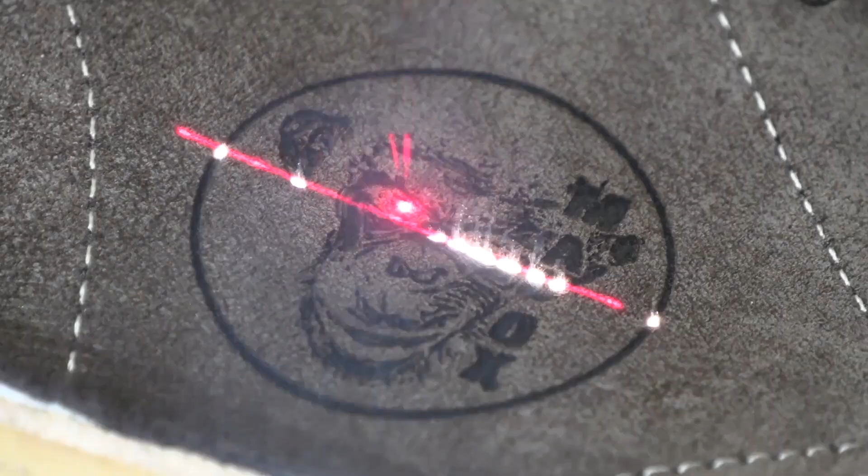In today's video, we're going to be doing something a customer requested: a 2-color 3D printed keyring or tag that's going to be attached to keys, with some words and a logo. Unfortunately, I cannot show that to you, so we're going to do an example instead using the AM logo, just to show you how it works. We'll show you from start to finish, design to print, with our K8 printer. So let's get started.

Okay, so we're here at our computer and we're going to start off with our 3D design. If you do not have a 3D drawing program already, I suggest using TinkerCAD. It is absolutely free, you can find it on the internet. Once you've downloaded what you need onto it, it's as simple as going import, then choose a file, making sure it's either an STL, an OBJ, or an SVG.

That is a pre-required thing you need in order to start with a logo or any text. But if you do not have a logo from a customer and cannot convert one, there is also a text tool built into this program so you can type the word out. Once you've typed it out, or got it as it is, the first thing we need to do is talk about size.

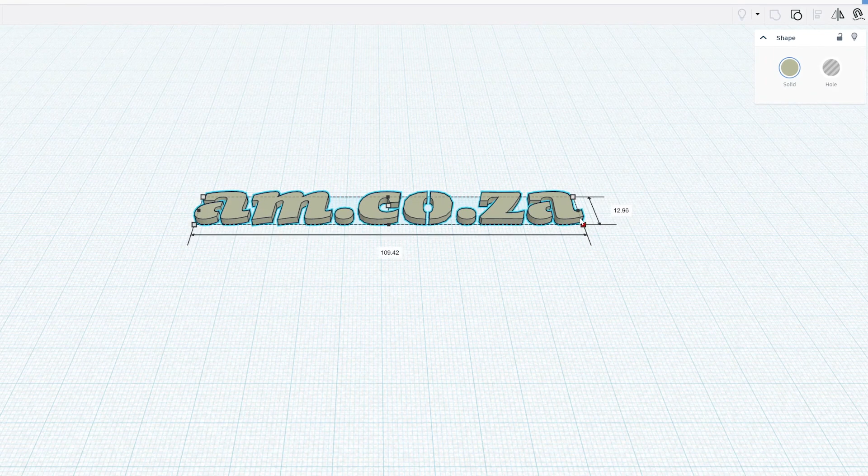We already have a size here, but I wanted to change it so it's a bit more accommodating to what we are wanting to do. We also don't want it to be too large, since it's attaching to a set of keys. So I'm going to hold down Shift on my keyboard and drag this in so we can get to an even proportional size. If you let go without holding Shift, it will just make it to whatever proportion. So we must hold Shift in to do our proportional size. I'm going to take this down to about 100. That's perfect, it will leave it about a centimeter tall.

From here, we need to talk about our base - this is the top piece where it's initially going to be changed into a different color. The first thing I'm going to do is grab this cone that's here and push that up out of the way.

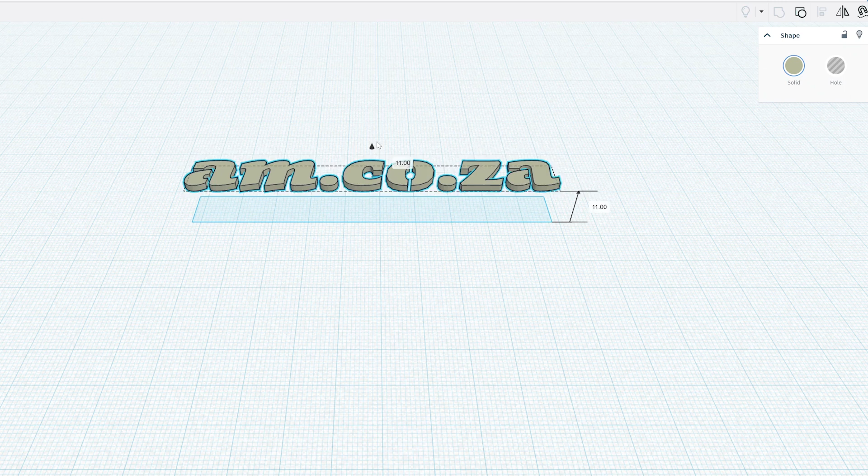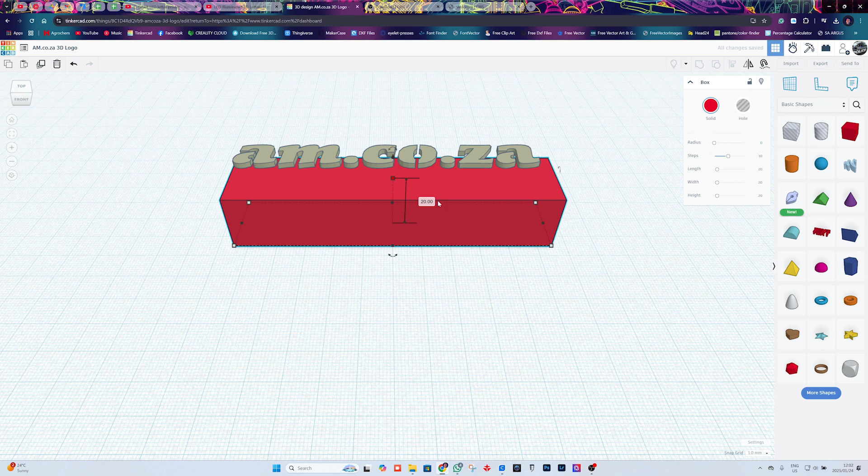From here, we're going to get a square or box or any shape that you really want - if it's a circle, click cylinder. What we need to do is make this a little bit bigger than the size we originally chose. I'm going to grab this white square here, that's the thickness, and I want this 3 millimeters thick. The reason is I don't want it too thick where it's too rigid and it'll snap. At 2.5 to 3 millimeters thick, it still has some flexibility if someone is playing with it.

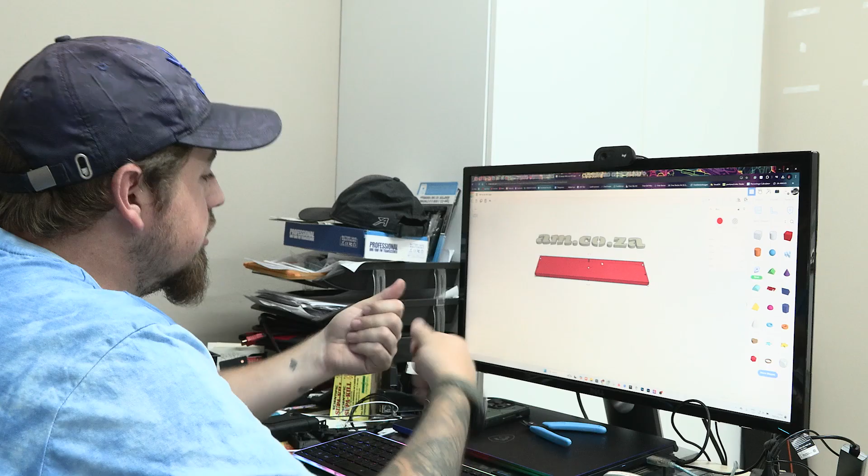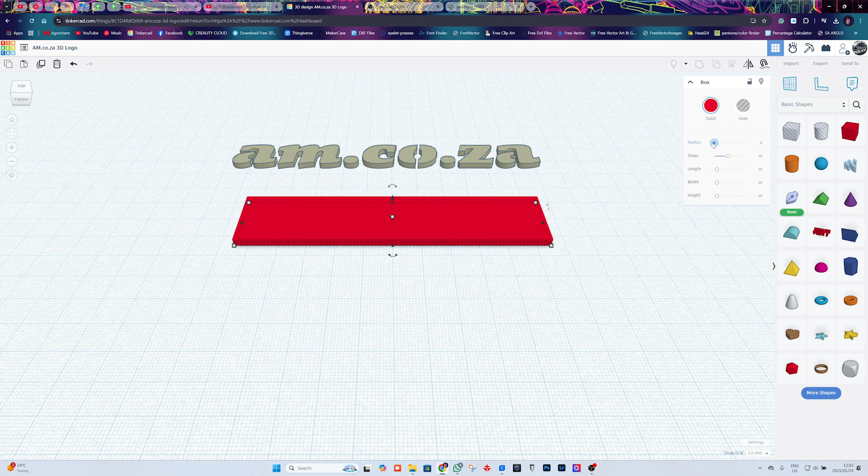From there, we can round our corners to make this look even better, and then once that's done, we'll make it to the right size. We go ahead and pick our radius here, and you can see how that's turning the corners in. If you don't want it as aggressive as that, you can make it less. I'm just going to make it slightly curved, just like so.

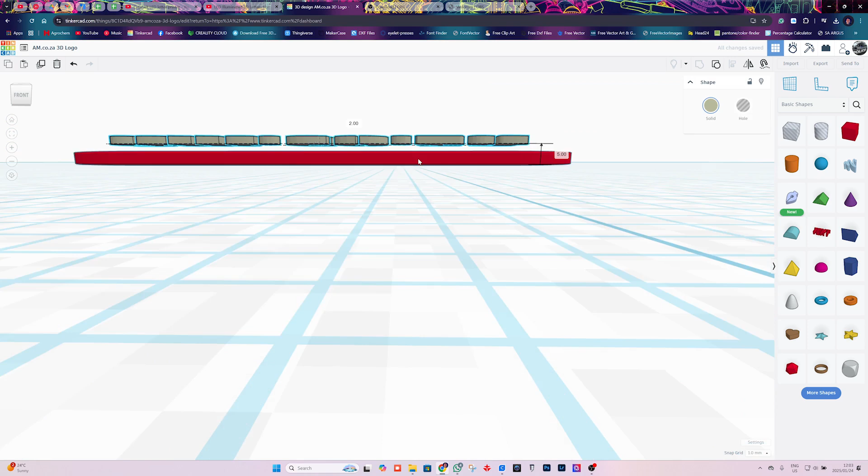Now that's done, I'm going to grab my text and bring it back down again. What you can do is go to this section and click 3 millimeters, because that should be just above the height of our bottom piece here, which is the amount we chose. So if you did 3 mils here or 4 mils, you need to make sure you change when moving this up and down to that correct amount. You just move that up or down, click 3, enter, and now you're directly on your shape.

So now what we can do is hold down our right click and move down so we can see it from above. Or you could click top on the square in the top left corner, or click on the different corners to see it from different angles if your mouse isn't behaving. Or you can hold in your scroll tool or scroll button and move like so.

Okay, so what we want to do is go ahead and drag a square or rectangle over your artwork, and what I want to do now is align everything to see if the size is too big or it's just right.

So we click on align here at the top, shortcut is L, and we're going to click on the circles in the direction we want to align it. If we do it like that, we find that maybe the height is too much, then you can click on one side and change it, or simply drag it by hand. But I recommend doing it this way, it's a bit more accurate.

So we're going to change this to 20, and then again drag a rectangle over it. As long as it touches, it will select, so you don't have to drag over the whole thing. Go back to align, and align it back in the middle there, and it's almost the same distance all the way around, which is acceptable.

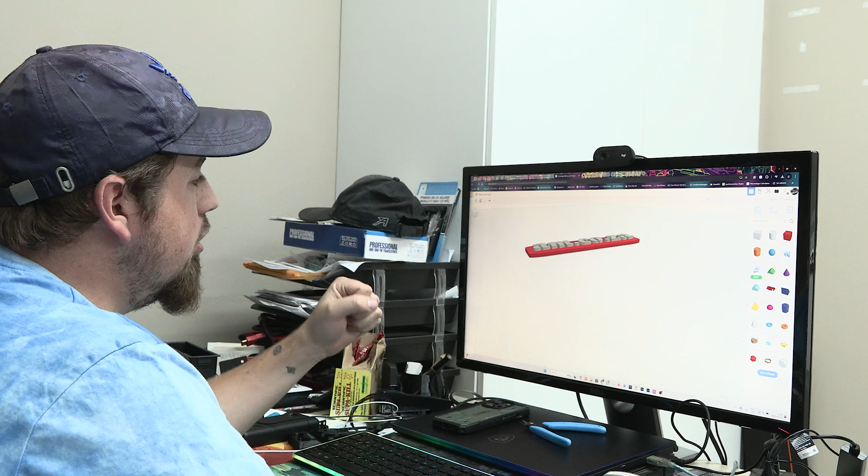Now we've actually got a three-dimensional image that we can print in two colors. But I did say earlier this is going to be a keyring, so we need to make sure we can put an eye or keyhole for that keyring. The first thing you can do is punch a hole in your original base plate so a keyring can go through, or we can add one to the side. I'm going to show you both so you know what they look like.

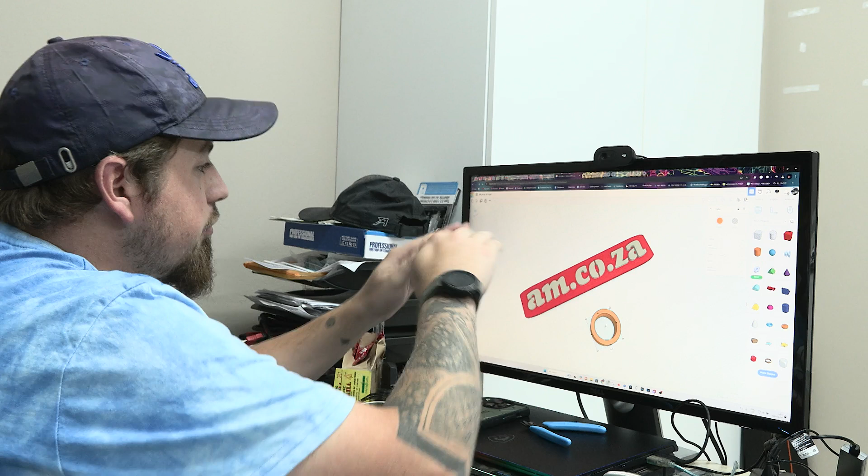The first one I'll show you is adding a keyring. We're going to grab the tube. You can grab the actual torus, but then you'll have rounded edges and the printer will find it difficult to follow that curve, so let's go with straight up edges. Or if you design this to a point, you should have a 35 to 40 degree angle, and the printer won't need support to support that angle.

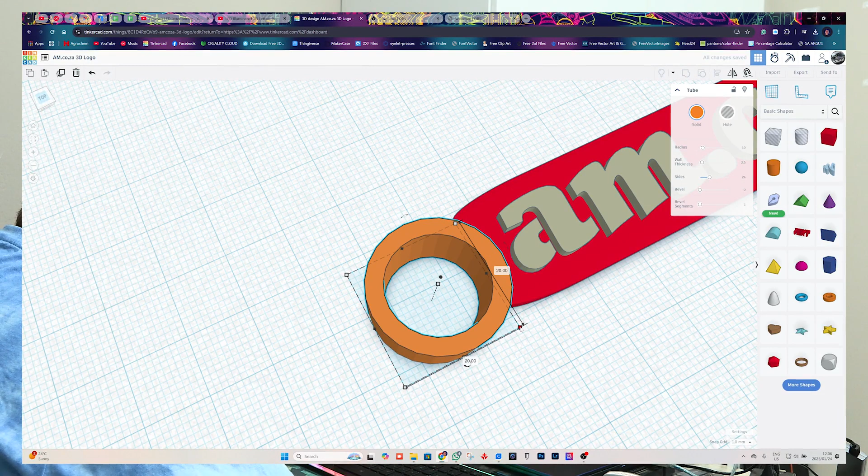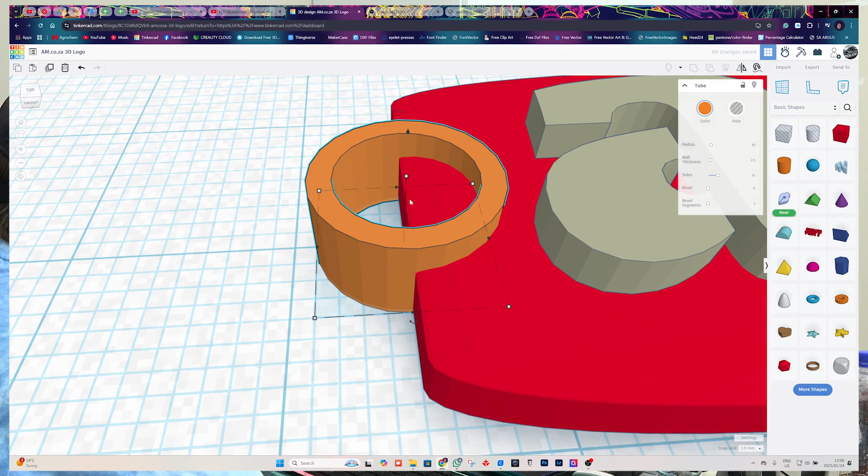So let's take our ring and move in closer. First I'll hold down shift and bring it smaller because right now it's too big. We'll look from the very top so we can see better, select all of this, and align it in the middle because that's what I'd like. Now we can bring this down so it's the same height, or even smaller, something like that. That looks a bit classy.

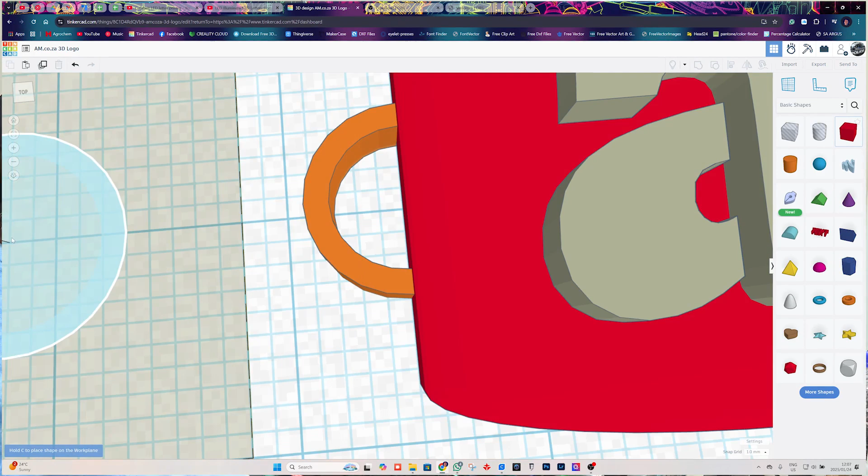So that should work, but what we want to do is check the distance from here to here. We can either look at our radius and do the calculation, or if you're lazy you can grab another square and make it smaller until it fits inside our small little hole here, zooming in to check until it fits.

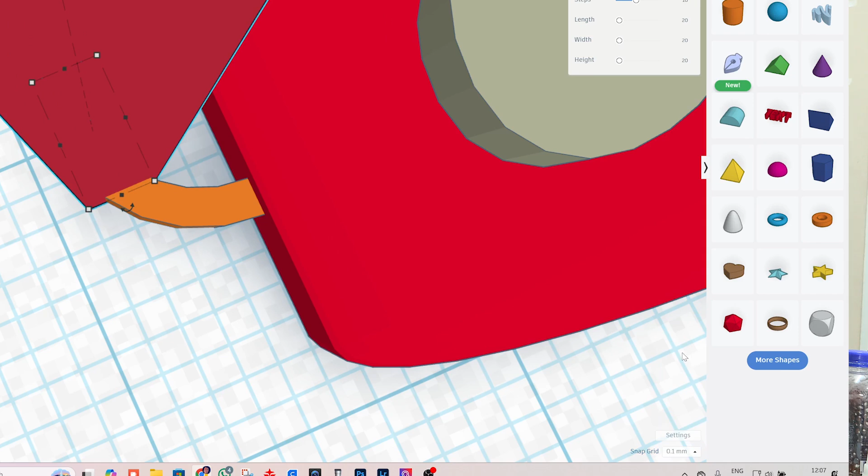If you find it's snapping to the squares automatically and you can't move it in between, in the bottom right your snap grid is set to 1mm. You can switch it off, or set it to 0.1 of a mil, which is more tolerable for moving things around to see where it actually is. So we'll leave it right there, just on the edge, move this out here, and basically we have almost 3 mils of a gap in that keyring area, which I think is more than enough.

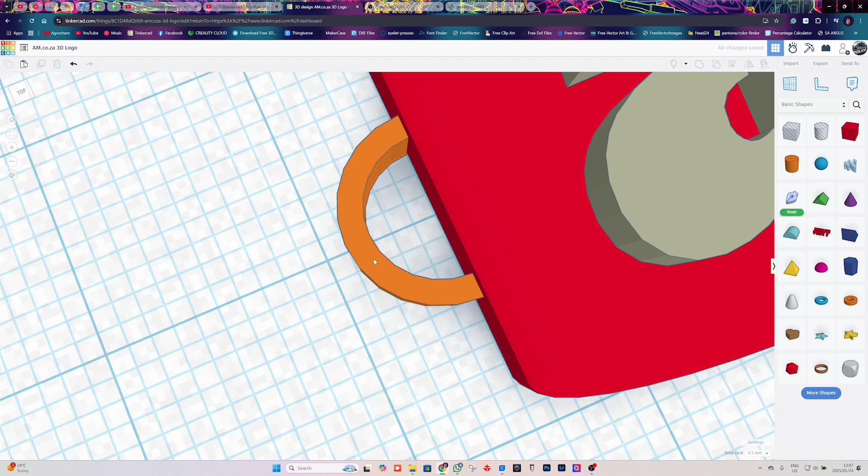So delete that image, we'll go back and select this one. Now we've got a bit of a jagged edge here, so I'm going to smoothen that out by adjusting our sides. That's just to smooth out the sides, or you can have it very rough, like you can see there, almost like an octagon. So we'll just hit that to full, so we have the smoothest side available.

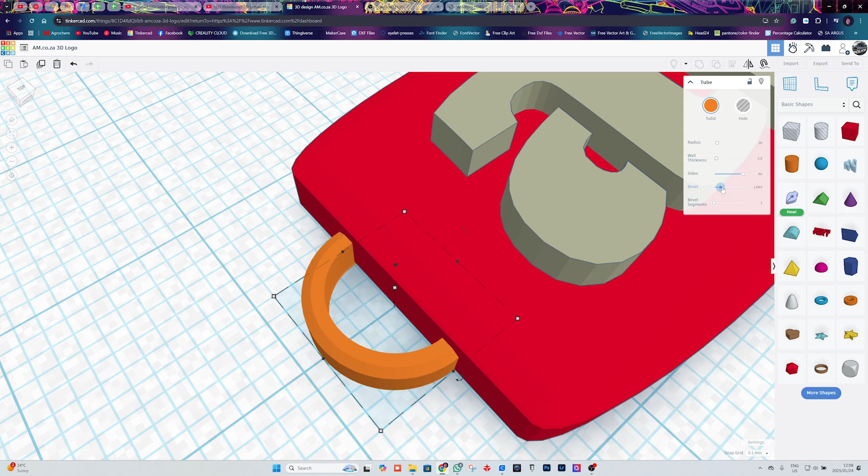And we can even add a slight bevel to it as well. But keep in mind, if you're adding a bevel there, it will add a bevel at the bottom too, so you need to make sure you're doing this correctly so you don't have an uneven surface printing underneath. You want to try and keep it as flat as possible.

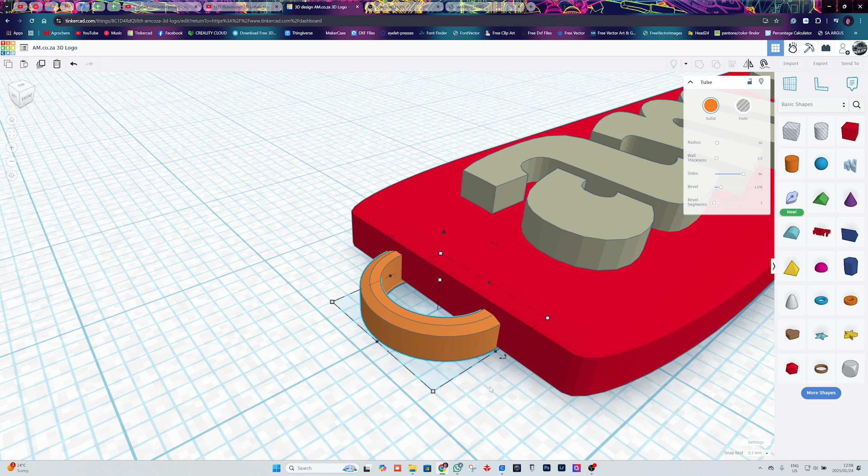Now I'm also going to show you something you don't normally see, and if you're not paying attention you'll have this problem. We'll go back to bevel, and I'll leave it straight because it's simpler. Then as we go underneath here, you can see there's a gap. You have a few options here, but you don't really want this gap underneath, otherwise your printer won't be able to stick anything to the bed in that area and you'll have a failed print.

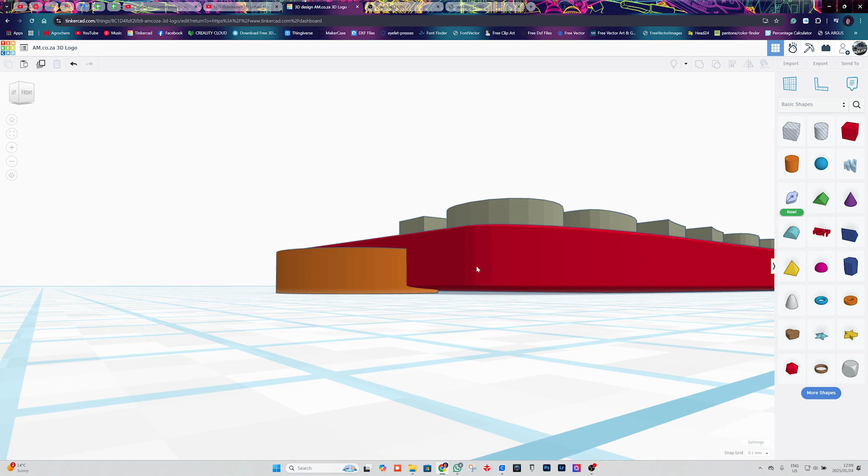So what we can do is make it taller and then cut off at the bottom, so we only have the beveling on top, which is one of the easiest ways to do it. So what we do is make this 4 mils rather.

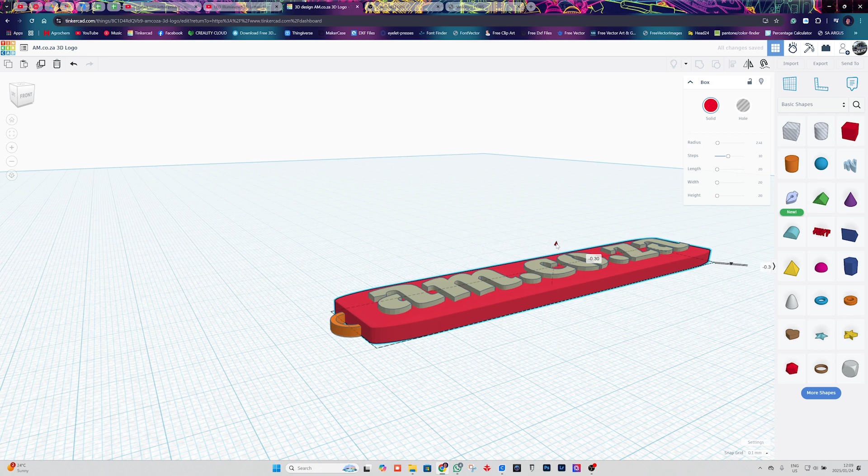We're going to pull our tab down so that we're pulling it down, and we just want to move out the way so we can actually see it. So we pull it up.

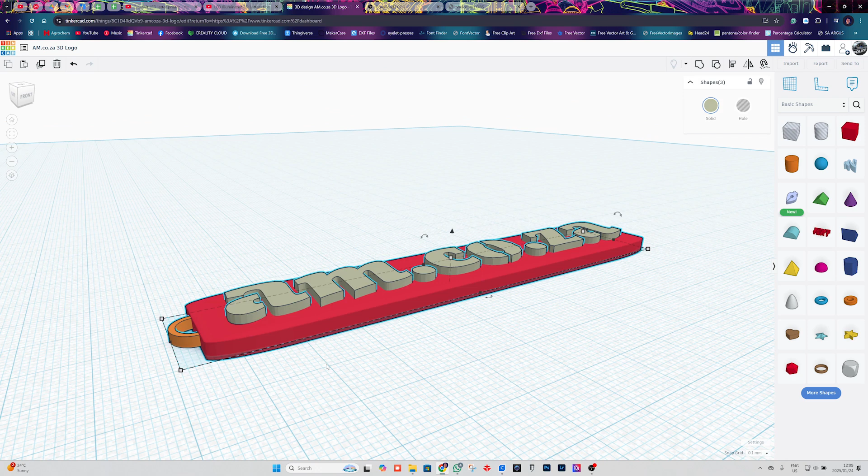Basically what we want to do is we want 1 mil under our build plate. So we're going to go -1, and that will leave an entire 1 mil of our design underneath the build plate. That means it's not going to be cut off, it just means it's underneath and you're only working with what's on top. But if you select this and export it, it will export that 1 mil that's underneath.

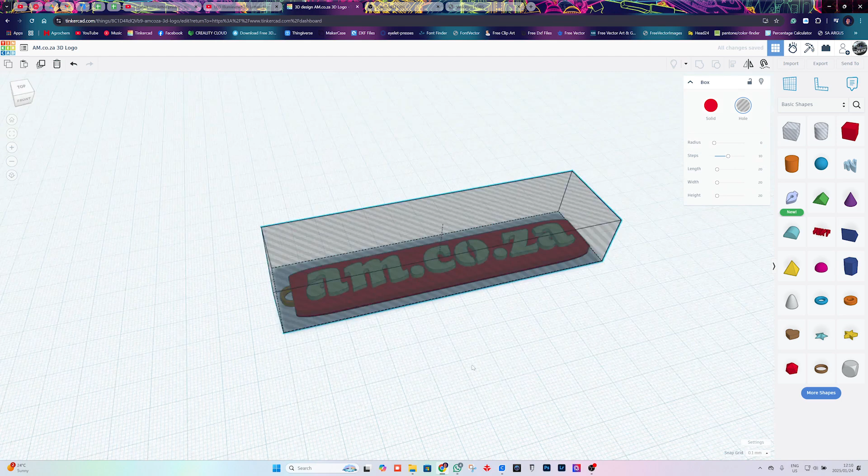So what we want to do is get rid of it completely. So we go ahead and click our square as a hole, and we're just going to make it the same size as our keyring, actually a little bit bigger. We're going to look from above, just to make sure we're covering it.

Again, what we want to do here is, let's say for instance we make this 5 mil, we're going to move this, click on that, and make it -5 mil, so it's sitting underneath our actual plate, our surface, and as you can see it's sitting completely underneath.

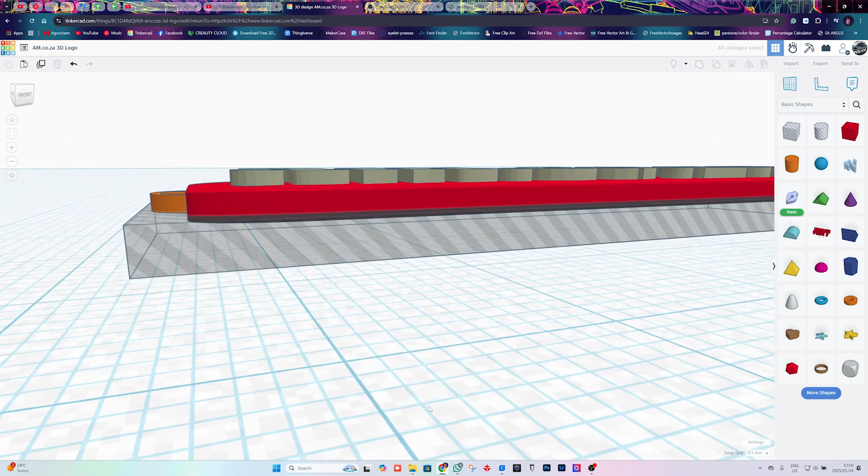So what we want to do now is select the red, hold down shift and select the whole object that's underneath, and we can go ahead and group it. Now that's going to cut the bottom square and leave a flat surface, which is exactly what we were looking for.

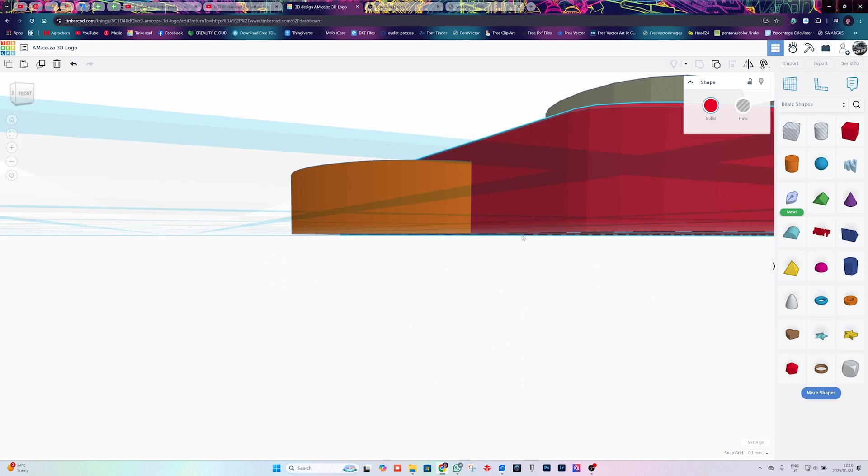Now the printer is going to print that perfectly flat, and then at the top you're going to have a very nice bevel, something a bit more elegant. And again, our letters, if we zoom in, there's no gap between our letters, so those are directly on top, which is exactly what we want. This is exactly where we want it, it's to the size we want it.

So now that this is finished, we can just go ahead and select everything, and group it. So that is one way to do the keyring part.

I'm going to quickly show you the other way, the way that I want to do it, so that it looks a bit more uniform and it's going to be a bit stronger, because sometimes these keys on the side will break off. Don't worry about that, it just changed color now because it's just finished grouping together finally.

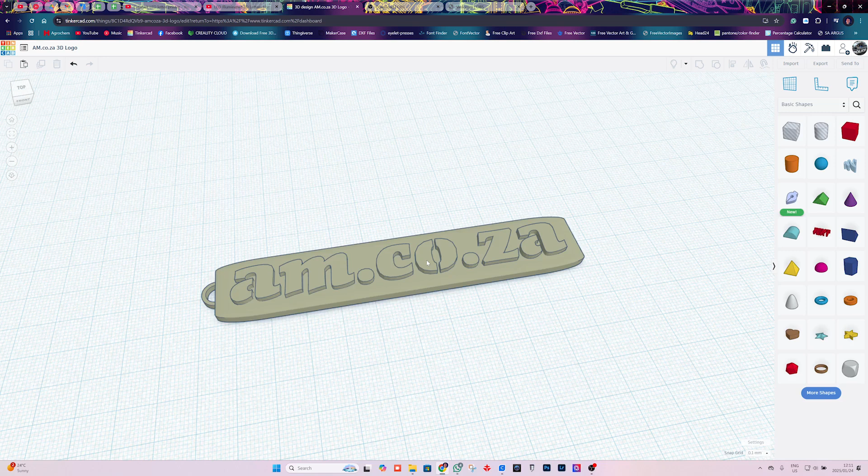So now it's one solid object, not in many different pieces. We can go ahead, and if you want to edit something, you just ungroup it, and then you can edit it again. So I'm going to delete that ring because that's not the one I wanted, I just wanted to show you other options.

Now what we're going to do is purposely move our objects or artwork over, or leave it where it is, and I'm just going to make one side longer. And there we have it.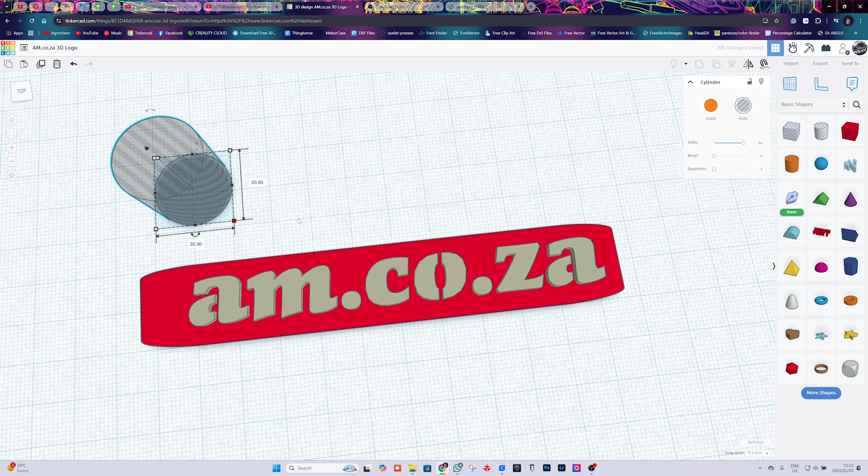So now I'm going to go ahead and select my hole. We can make it smaller, but I first want to make the sides nice and round like we did earlier. Then we're going to do a 3 mil hole in size, which will be more than enough for a keyring, and we can place it anywhere near the edge where a keyring can fit in.

So if you find that this will look fine somewhere around, let's say over here, then we can always bring this guy back in again.

We just move him over there into the corner, and once you're happy with that, we can select everything again, group it, and you'll see there's a hole cut out there which will be perfect for a keyring. I found this to be stronger because it's within the actual main structure, whereas that other keyring I showed you prior can snap off if you're a bit aggressive.

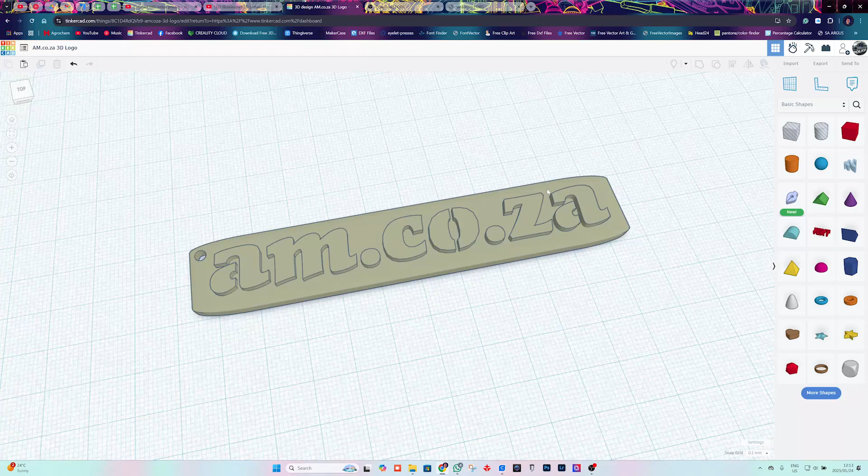Okay, so we've finished our 3D designing process. Now we need to move over to our slicing program and do all the settings there.

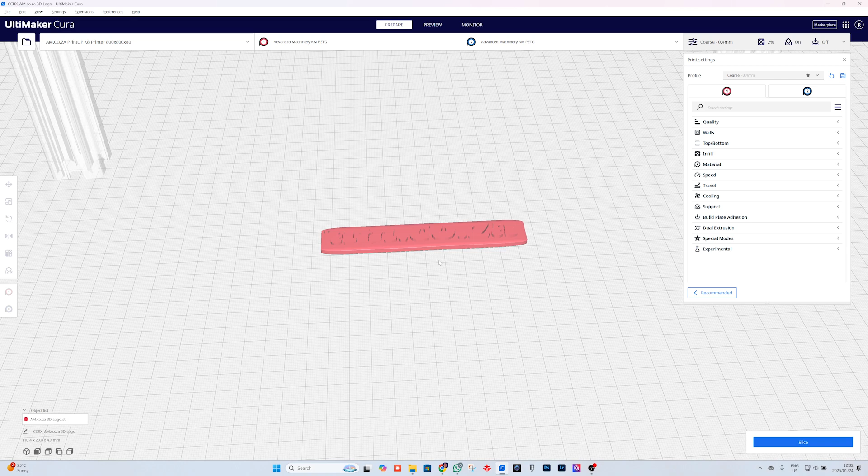So what we need to do now first is just import our artwork that we have saved from TinkerCAD or your 3D design program of choice. So now that it's here and it's imported, we can have a look. There it is there, exactly how we designed it in our 3D drawing program.

Now what we need to do is, again, I'm going to quickly go through these settings, and if you want to see them, go ahead and look at that full video on YouTube.

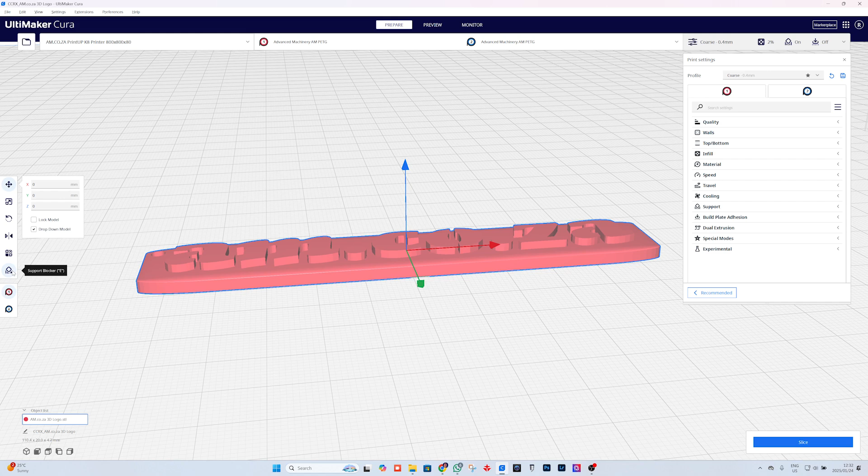So I'm going to need to just add myself a support blocker. Go ahead and click anywhere on this. We're going to go ahead and just move it out the way. Once we've done that, I just need to change the size of it, make sure uniform scaling is unticked.

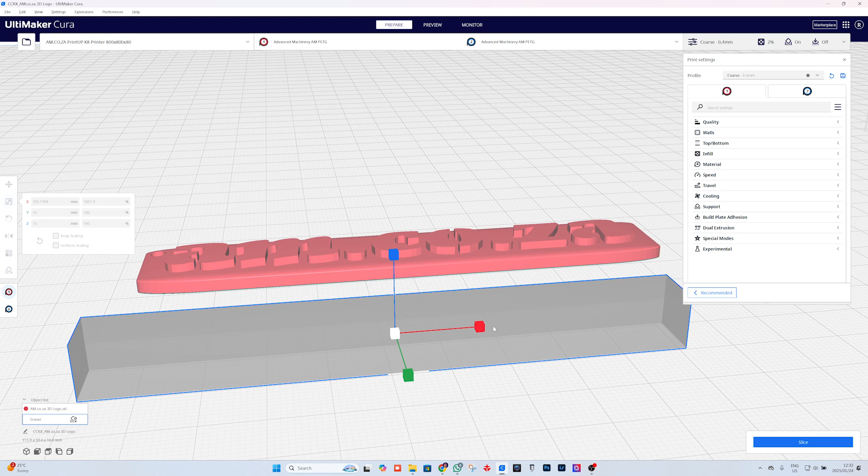We just make it much larger than the actual item, because we need to cover it completely. And we can move that over. That should be fine. Let's go ahead and move that over our object. So now what I'm going to do is just make it smaller so that it's not sticking out all the way. And we snap that to the base.

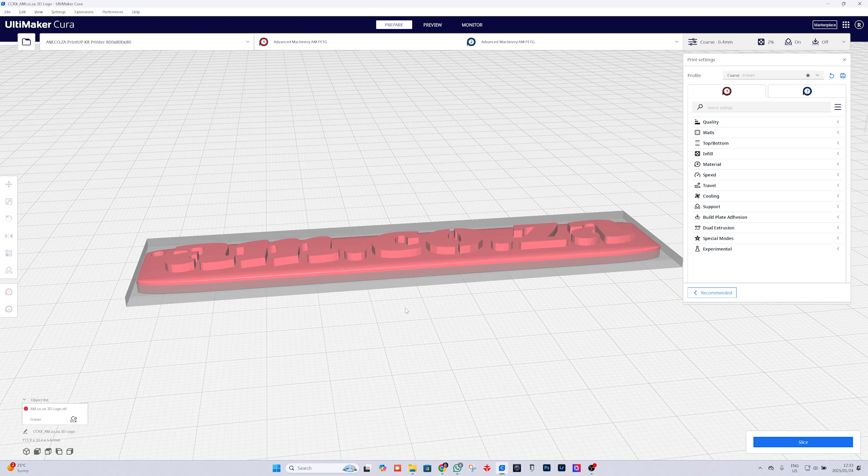So now we can see we've got somewhat a covering over here, but I need it to be bigger. I need to cover more of the letter. So we just go ahead and keep adjusting that until we are happy that we've covered enough of the letter.

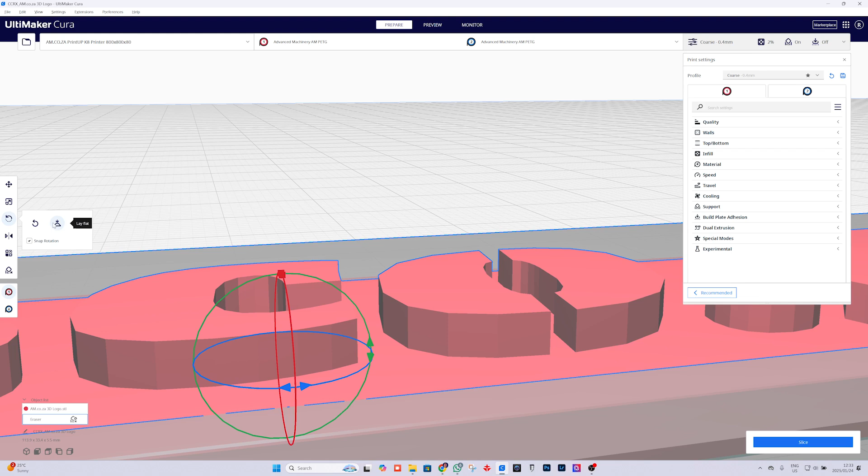And in this case, we've covered a little bit too much, so we'll go ahead and just make that a little bit smaller. Just a smidgen. We go halfway from where it was. We go snap to base. Okay, there we don't have enough, so let's go up again a little bit more. Just enough. Okay, and that looks perfectly fine to me.

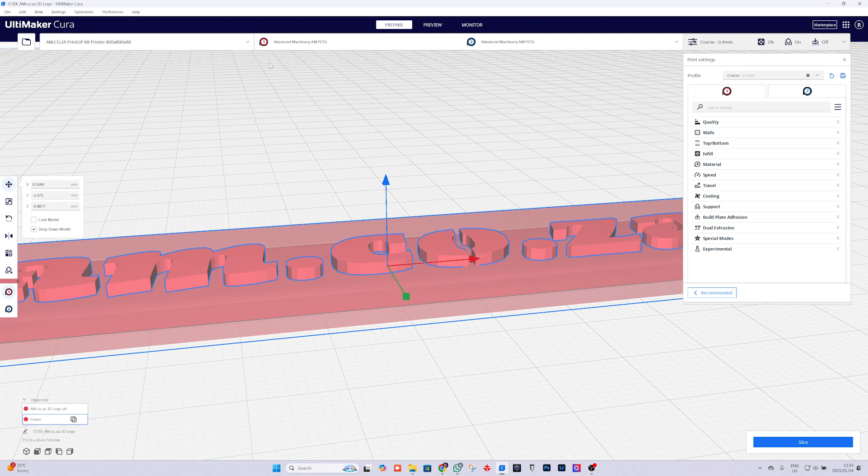So now what we need to do is go ahead and make this a cutting mesh item only. And now you can see our block has turned red, which is our first color. Our second color will be blue. So what we can do is go ahead and we're going to just multiply this block.

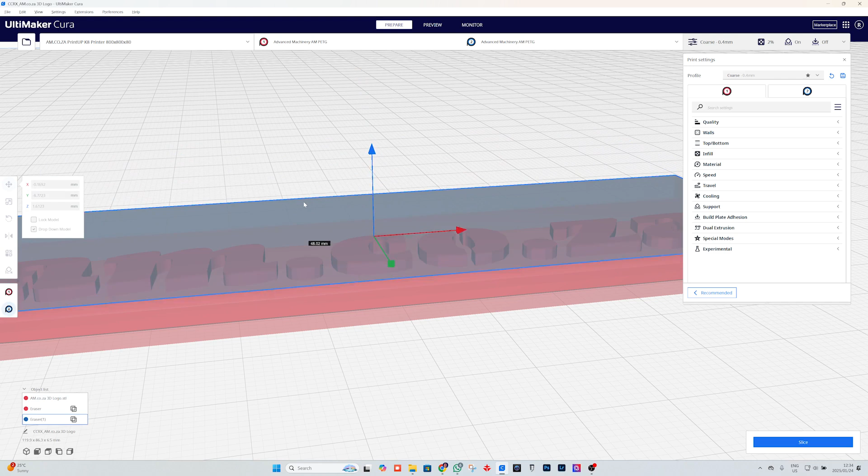So we've got a second one. The top one will move out the way. And what we're going to do is change that to our second color, which will be the blue one in this case. Now that we've done that, what we're going to do is just go have a look to see if we're on top of our previous object. And that might just take one or two times to guess, but it looks like it's pretty much spot on.

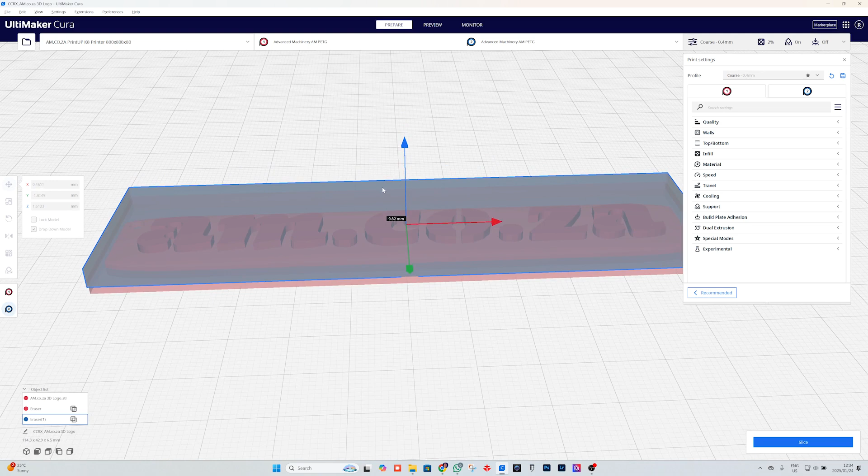So what we'll do is just zoom out and we can go ahead and just move that over. And it doesn't have to be 100%, as long as it's just covering your artwork. We select both and just move them.

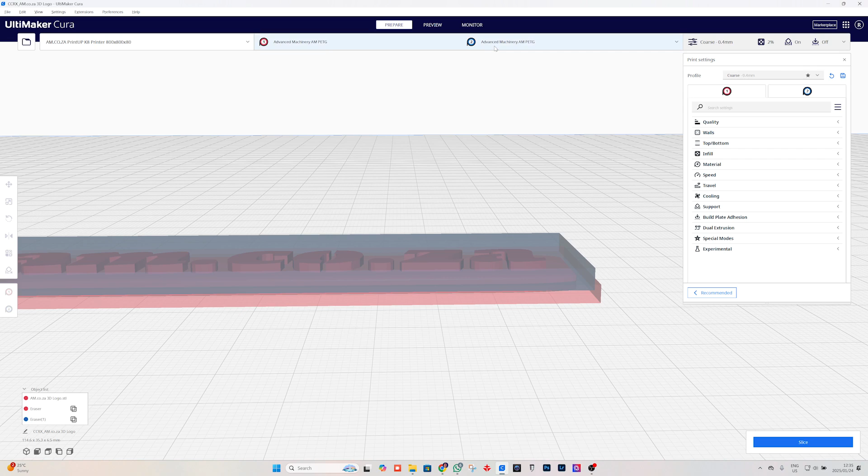Okay, so now that that's done, we can go ahead and do our purge tower. So what we want is our first color being red and our second color being blue, but we have chosen to do white as our base and blue as the top logo. So we must make sure we do that when we are adding our plastic to our printer, to add it in the correct sequence. So now that that's done, I'm going to quickly just adjust a few settings.

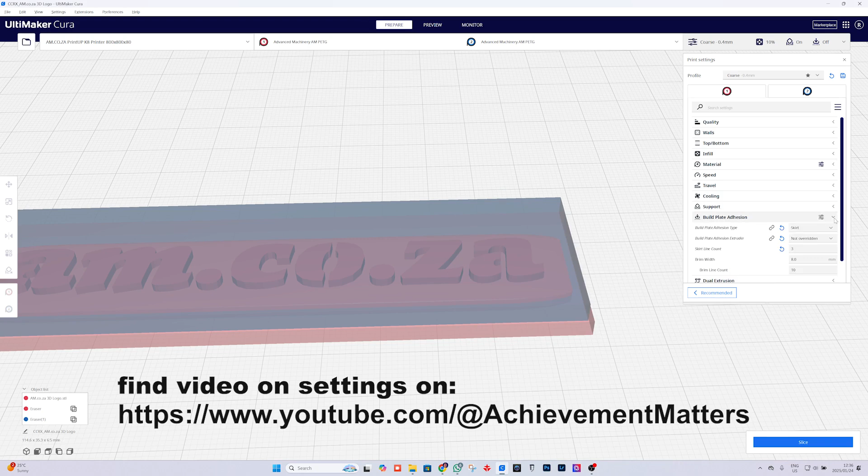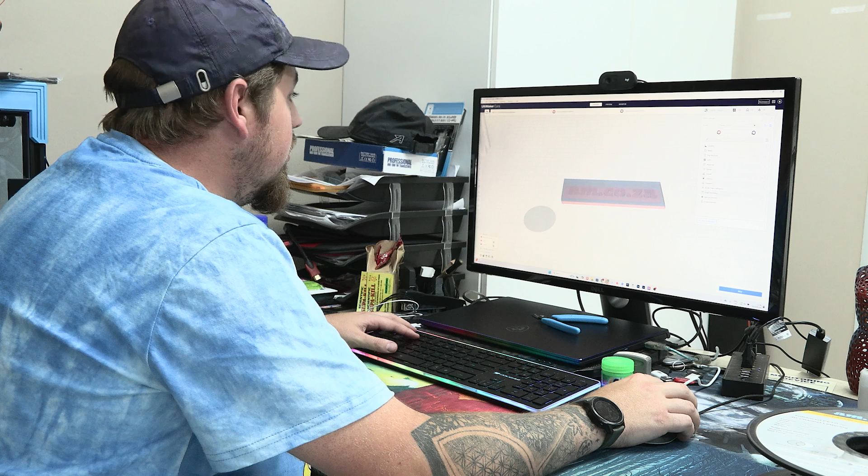Okay, so now we've done all the settings that we need to. We just need to go ahead. We're going to slice our build plate, quickly have a good preview.

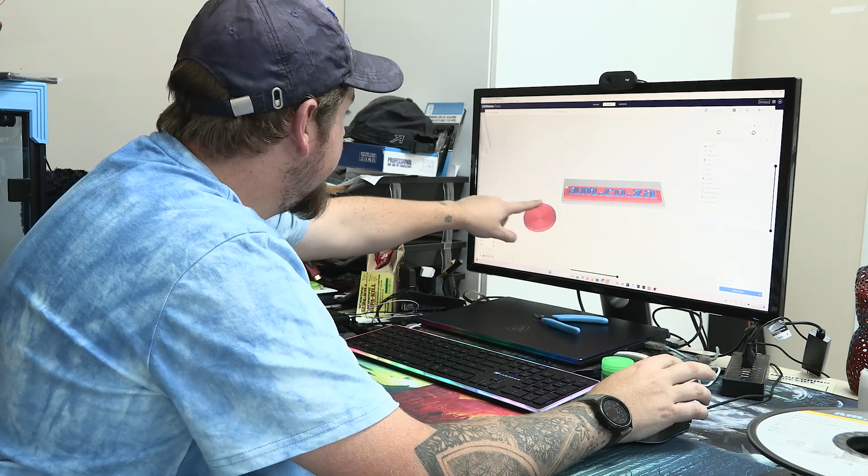And as I can see, I'm pretty happy with that because our first color will be all the way up until the letters. And then we're going to use this purge tower to purge whatever red, that color, is left, so it moves over to our next color. So now all we need to do is go ahead, save this to our memory stick, and then we can go straight to our printer, get that ready and start printing.

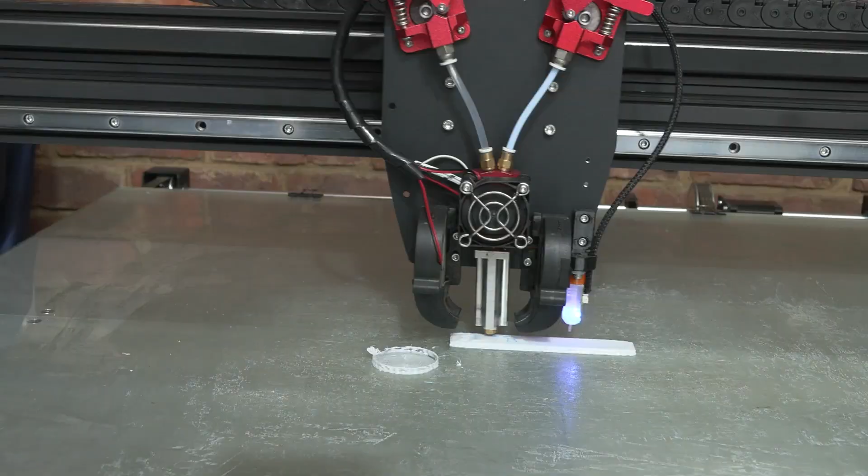Well, there you go guys, we are completely finished and we have it in two colors. As you can see, our white and blue. Now keep in mind you can have it in any color you want. This is a printer that can do two colors, and while you are changing its color, you can even go and swap out to another color. So you can end up having four colors at one stage while printing this.

So if you're wanting to do something like this, follow these steps that we've done and you'll come out with something very cool like this. I really enjoyed this video. The customer's going to enjoy this one. So again, thank you for watching and we'll see you in the next one.